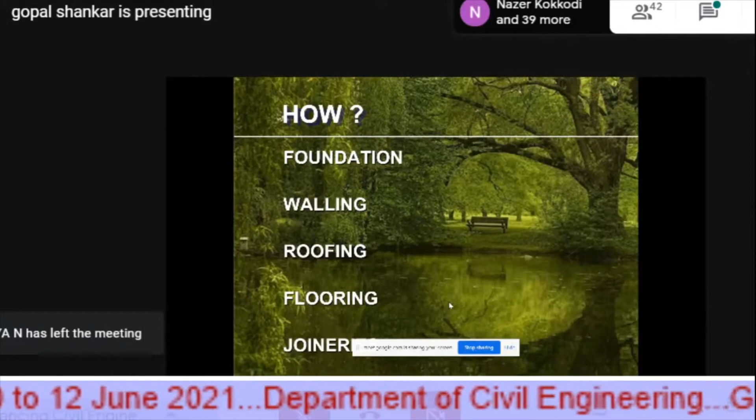Cost-effective technologies and materials can be used. We never talk about foundation cost-effectiveness, no, we don't talk about that. We talk about walling, yes, there are several options before you, validated by the Central Building Research Institute. They are all there, you know about certain options. But for foundation and roofing, we are very, very rigid.

If you want to make your building sustainable, you have to look at all these 5 elements: foundation, walling, roofing, flooring, and joinery. The time is very short, I may not go at length, but I will just mention some of the technology that we are trying to mainstream.

Rat trap bond, for instance, is actually a cavity wall. We sometimes call it rat trap bond because a rat gets trapped in this, it will not be able to escape. So to make it easy to remember, we call it rat trap bond, but it's actually a cavity wall, a 9-inch wall.

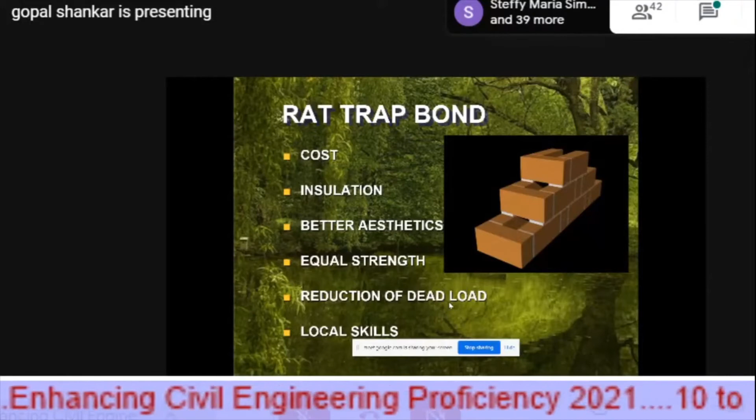What happens? The number of bricks comes down. You get a fair face on both sides, no plastering needed. When you avoid plastering, sand comes down, the quantity of cement and labor comes down. And what happens as an after-effect? Insulation. The space in between actually insulates, the air column in between insulates.

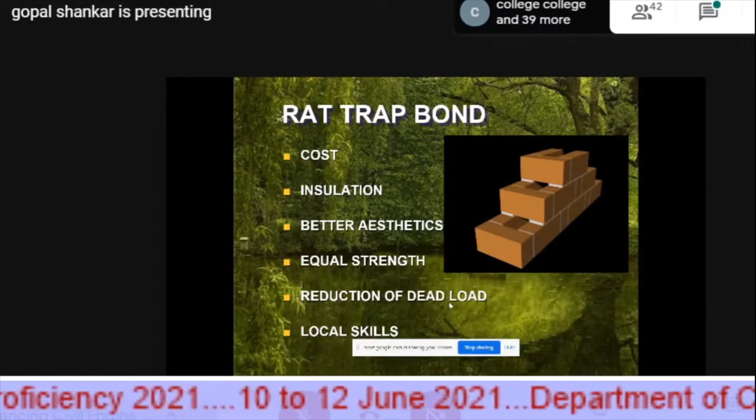People think that this is not strong enough. We went to the Central Building Research Institute. We went to SERC, Structural Engineering Research Centre, at Chennai, for validation of this technology.

How do you measure the strength of bricks? The strength of bricks is the compressive strength of the material. The compressive strength of normal, ordinary material is very high. We always multiply it with a factor of safety, and the results are quite acceptable. Ordinary country-burnt bricks are very, very strong in this.

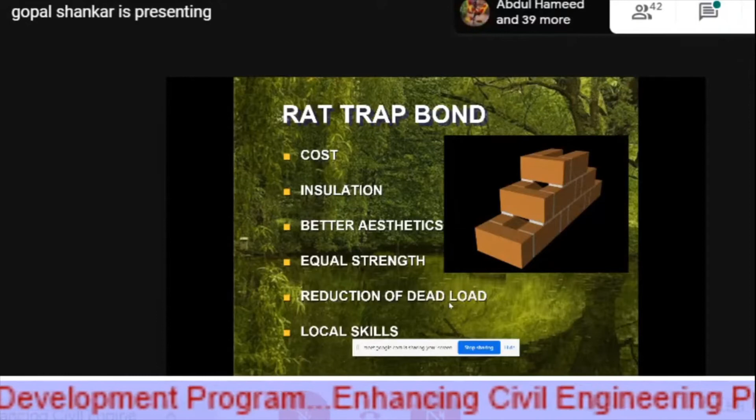These bricks, you'll be surprised to know, this is stronger than an English bond or Flemish bond kind of masonry, because you are putting the bricks on edge. I'm telling you, when you really look at it, let me put it another way.

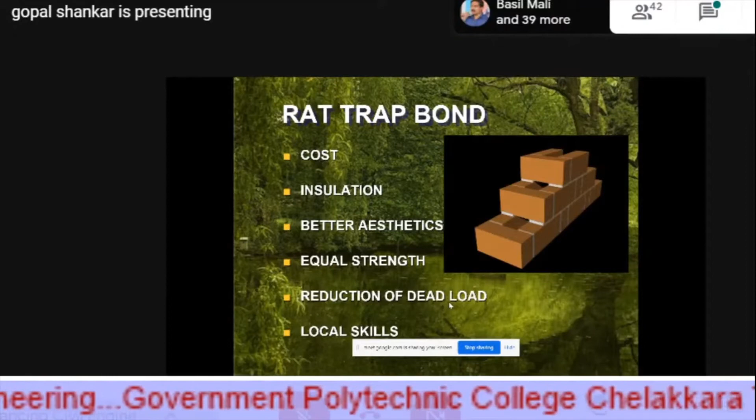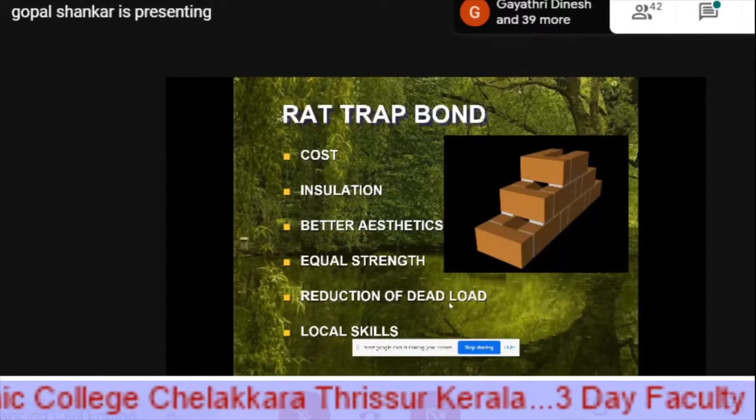You take a brick, a stronger lot among you, the male members. Probably if you are trained in karate, you put it on a support, with one chop, probably you'll be able to break a brick. But if you put the brick on edge and try to chop it, your palm will get broken, not the brick. Very simple technologies and very simple engineering.

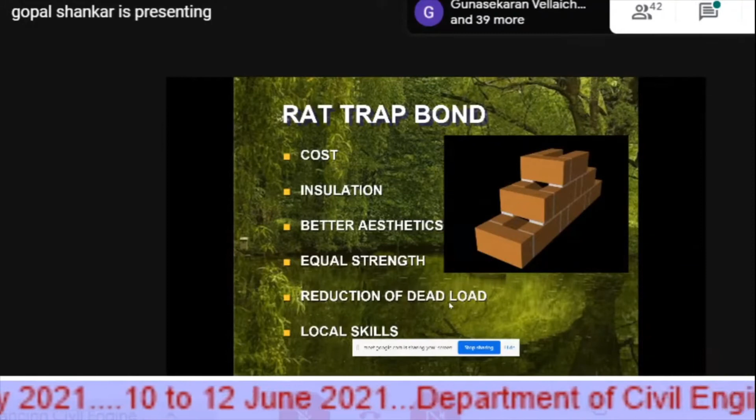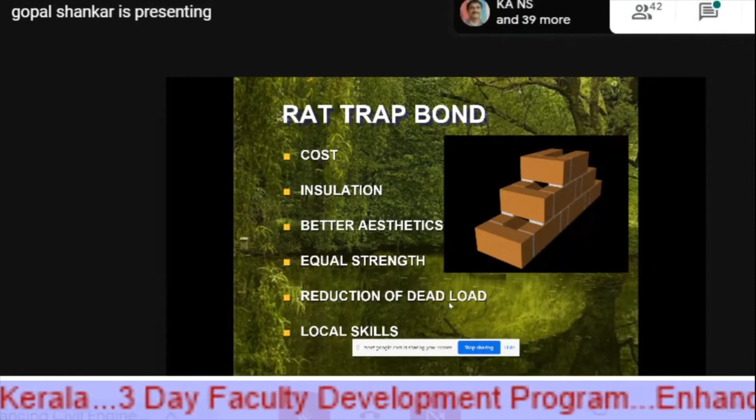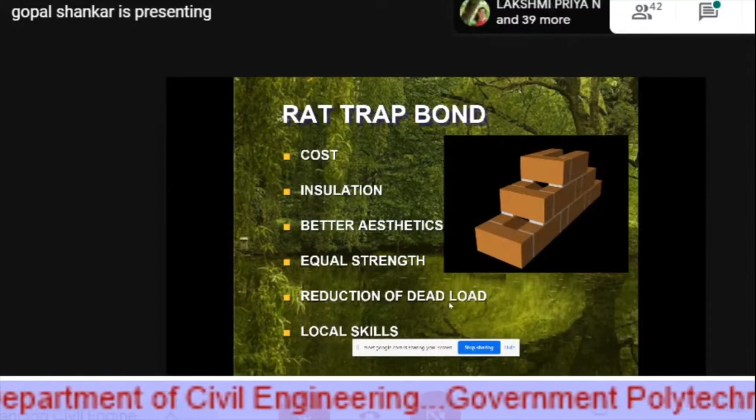And aesthetics is very beautiful because you get both the faces. Normally when you do a brick masonry 9 inches, you get only one face fair. The other face looks terrible, completely out of this thing. So here what happens is that you get both the faces, no plastering needed, more strength, better, and you get insulation in between, and it can be done by local skills. That's why this is how you should promote a technology.

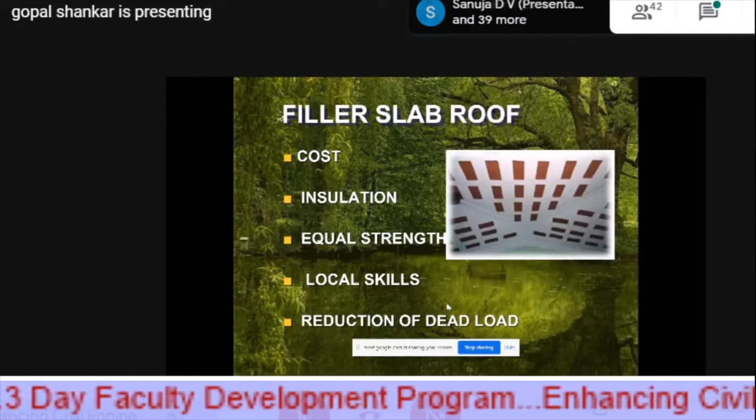Now, when you're talking about filler slab, I'm talking about 35 to 40 kilograms per 100 square feet of area. Are you shocked? I'm sure you're shocked. How do I reduce the quantity of reinforcement inside the slab? It's something that is quite interesting. I should actually tell you that.

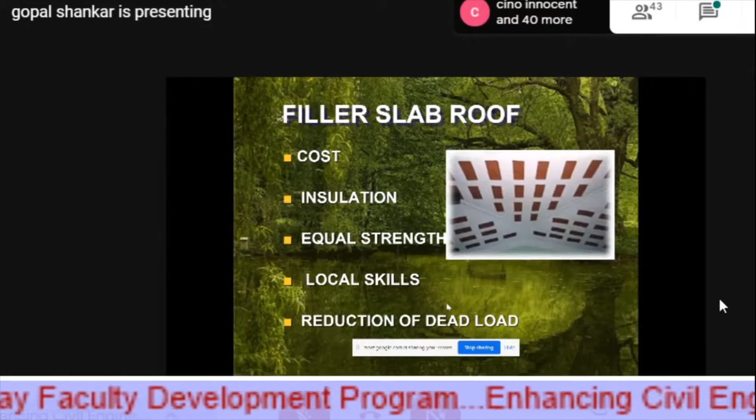How do you calculate the strength of RCC slabs? What are the criteria of this dead load? Many of you may not even know the weight of concrete. 1 meter cube of concrete, that is 1 meter into 1 meter into 1 meter, weighs around 2,400 kilos, my dear friends. 2.5 tons, my dear friends.

1 meter cubed of concrete weighs 2.5 tons. You can imagine the self-weight of the slab. Self-weight of the slab is very, very critical. That is the most important criteria when you design an RCC slab. The self-weight comes down by more than 50%. Now let me come to the dynamics of an RCC slab.

There's a tension zone and there's a compression zone. I'm not a civil engineer, but let me tell you, steel takes the tension and concrete takes the compression. When I say about RCC slabs, there's an imaginary neutral axis that passes through the center. Below the neutral axis is the steel. Above the neutral axis is compression, and that is concrete. Below the neutral axis is tension. But how can the reinforcement stand alone?

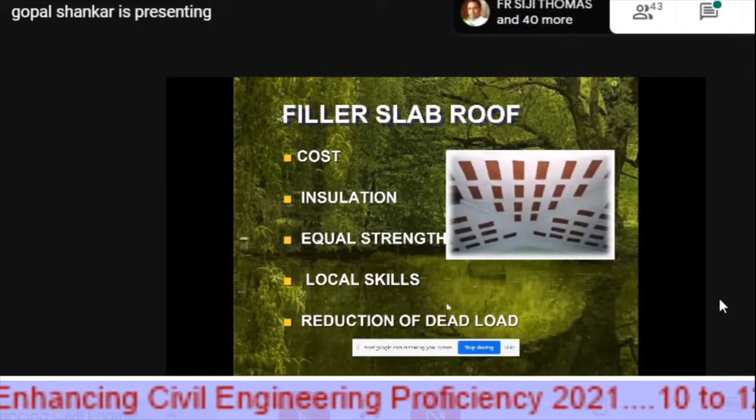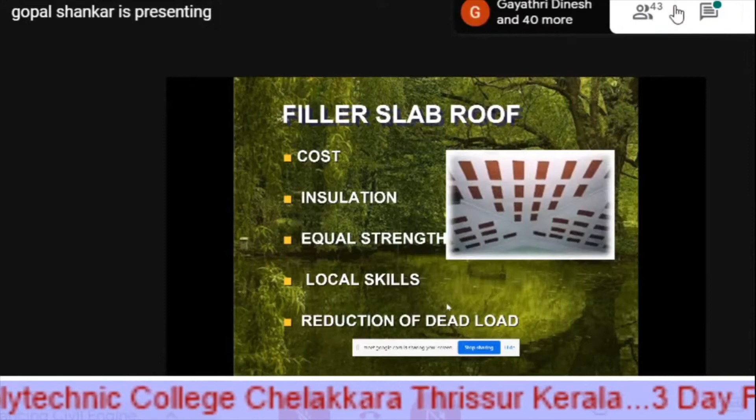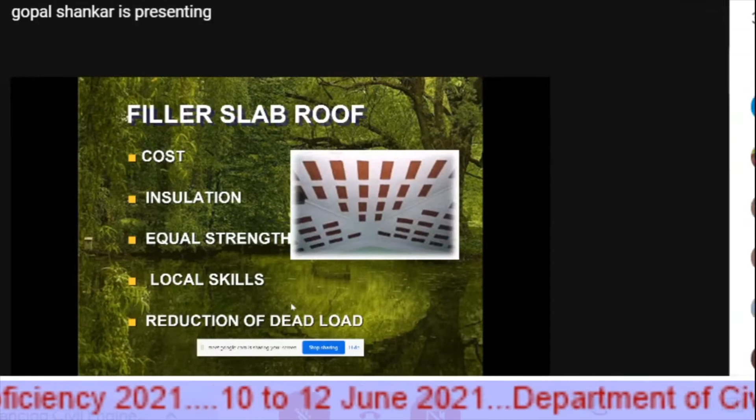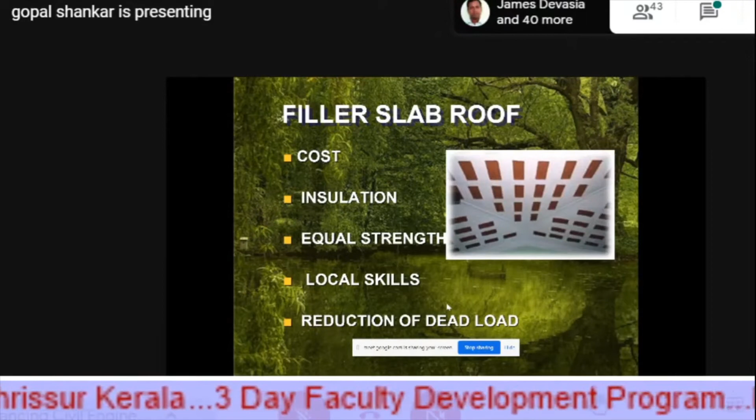You need some kind of covering. That is why we put concrete around the steel. Why do you need to put concrete around the steel? If it reacts with atmospheric air, rust can form, iron oxides can deposit, it will eventually affect the strength of the material. To insulate the material completely from these kinds of atmospheric vagaries and chemical reactions, we pack it using concrete. Concrete doesn't have any other function on the lower side.

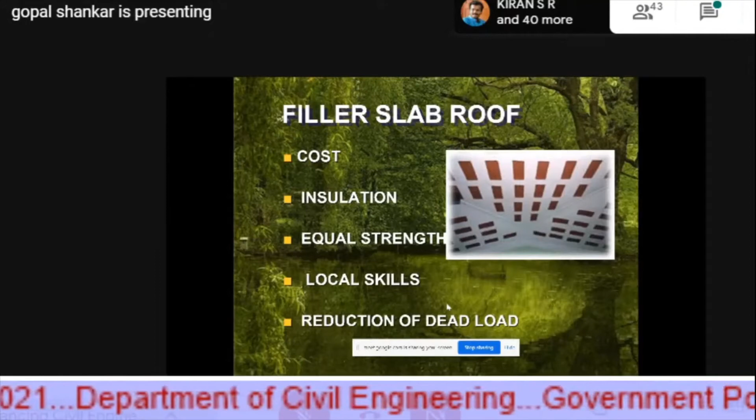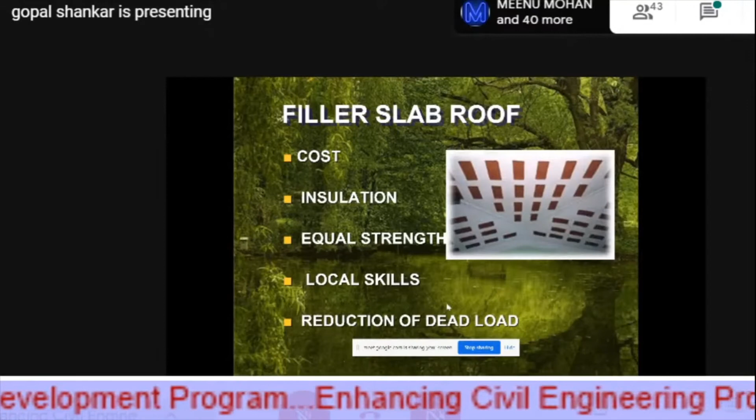So we take the concrete, the weight of the concrete comes down, and we use two waste tiles, rejected tiles. It's a filler material, it need not be a rejected tile. It can be thermocol sheets, it can be any damn waste material, it can be trash. You get it at a cheap price, and it's very easy because once you take the shuttering out, it will look good. You can see the picture there. It looks good. So these kinds of materials, I was talking about

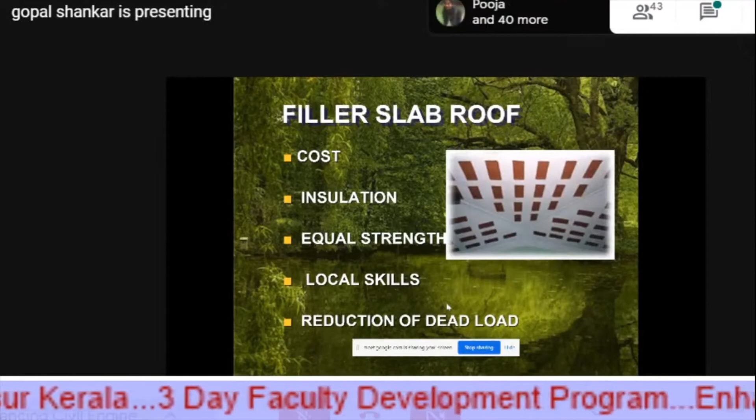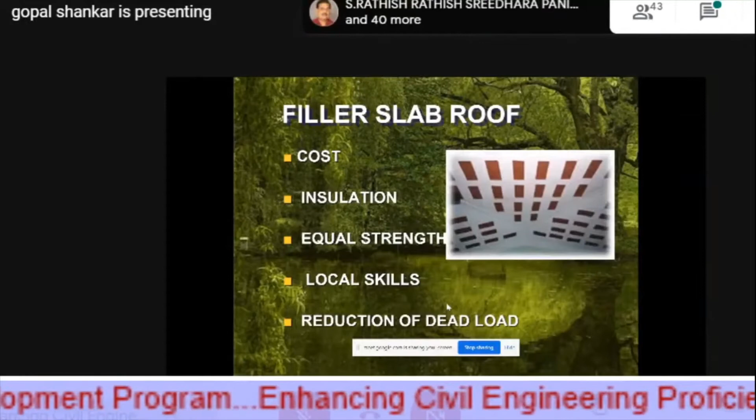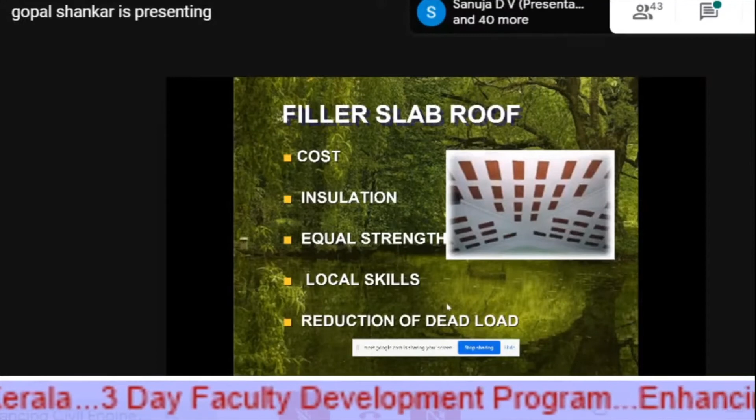rat-trap bond as a walling option, and a filler slab roof. You need lesser reinforcement, you need a lesser quantity of cement and sand. And two, it insulates. There are places where we put two tiles, one on top of the other, where we don't need concrete. There's a space, the profile of mangalore tiles, and it is slightly corrugated. The profile actually shows that there's a small air gap in between. That air gap actually insulates, very important, it insulates. And we have tested the load, this thing is equally strong as a very conventional RCC slab.

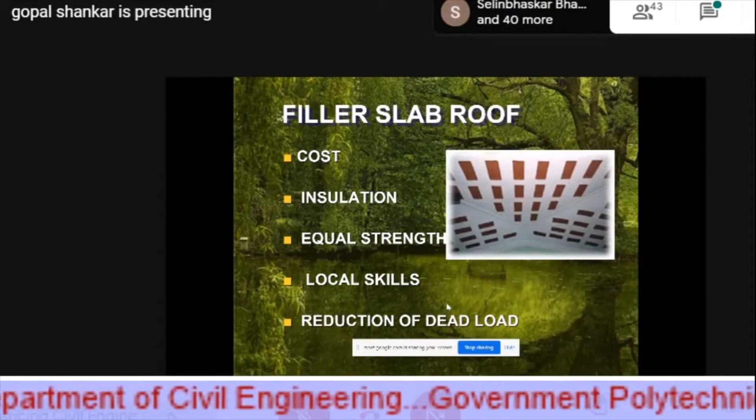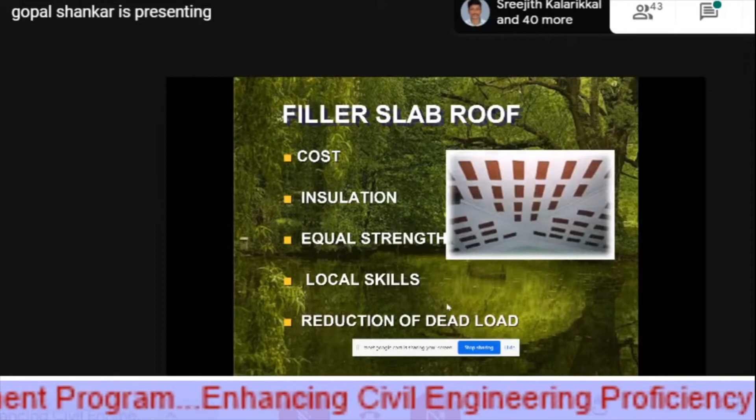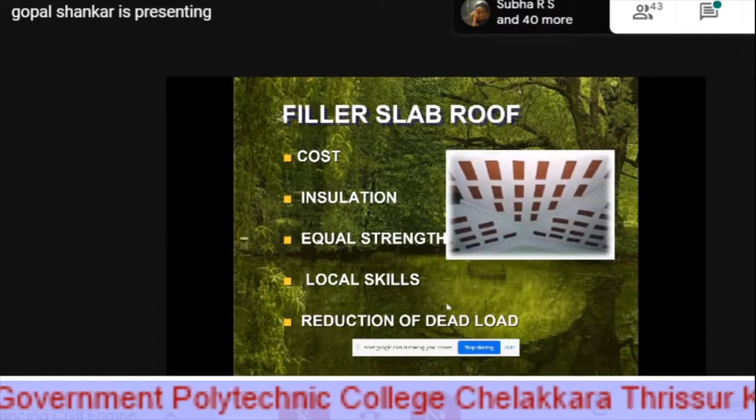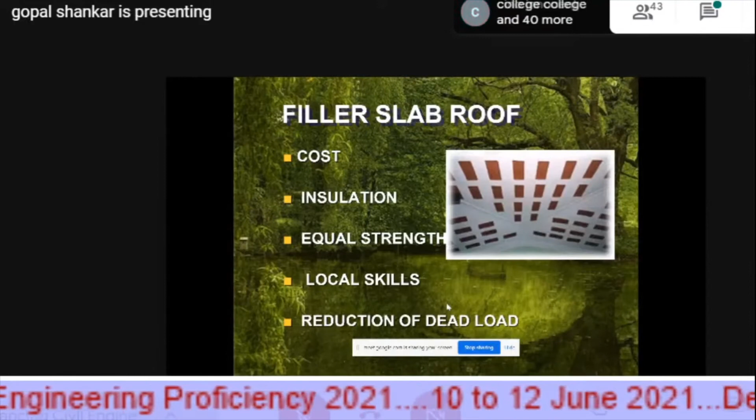And you don't have to bring people from outside to do this filler slab, our people know about it. The only thing is that you need to look at the spans, for everything, if you want to mainstream a technology material, you need to have engineering skill, engineering knowledge of the material and about the technology. That has to be followed, no shortcuts. If you follow the quality monitoring mechanism, then this technology actually saves a lot of money, and on the other hand, it's insulating and a very local solution. People had been ridiculing me for using terracotta material.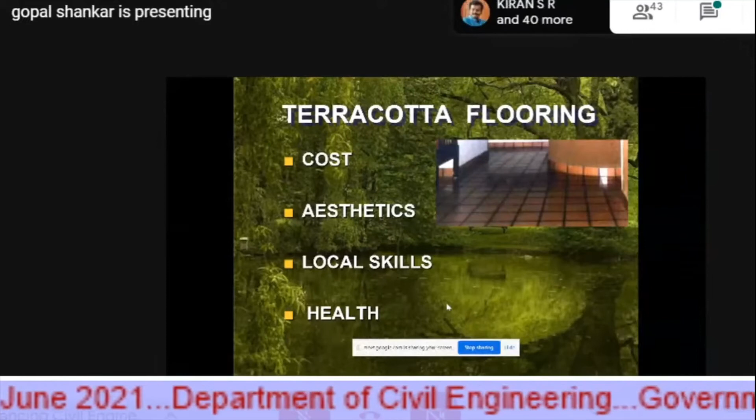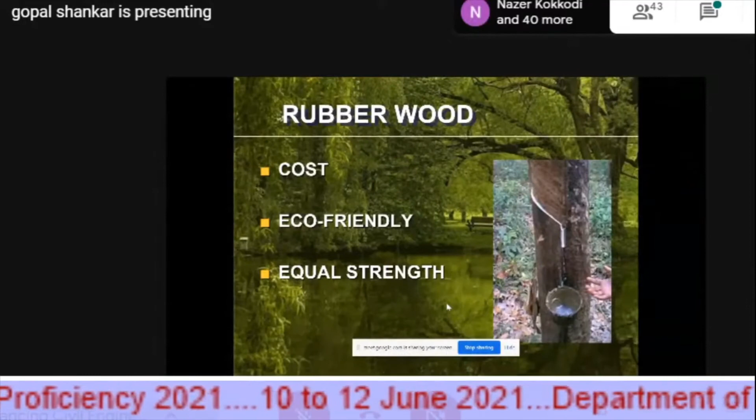When I started mainstreaming rubber wood property 30 years back, people used to take it only for packaging, waste boxes - after taking the latex of the tree for 25 years, you have to slaughter it. That's the word we use, slaughter the wood. Slaughtered wood would get carried away to some factory where they make waste boxes, temporary packaging and things like that. It's people like us who mainstreamed rubber wood in the main building vocabulary by looking at the properties of the wood.

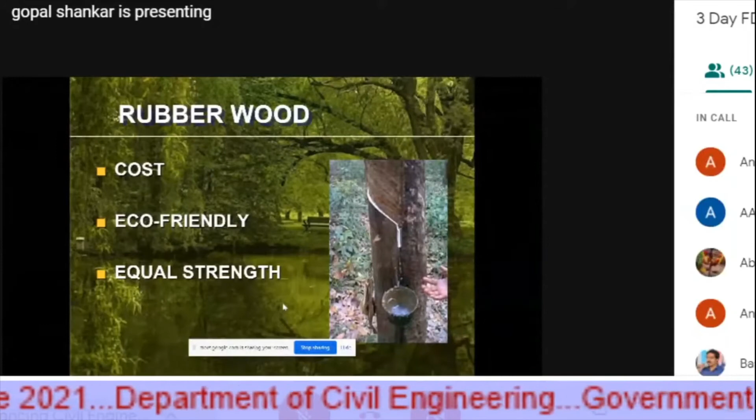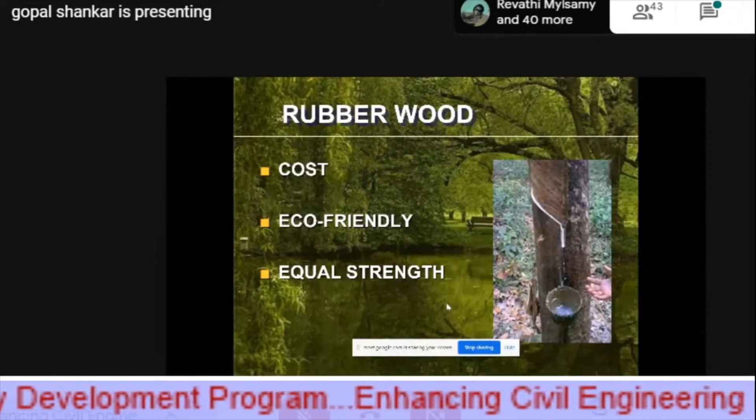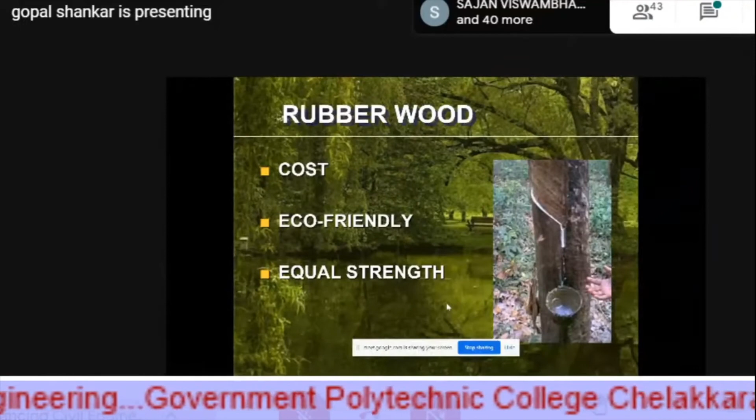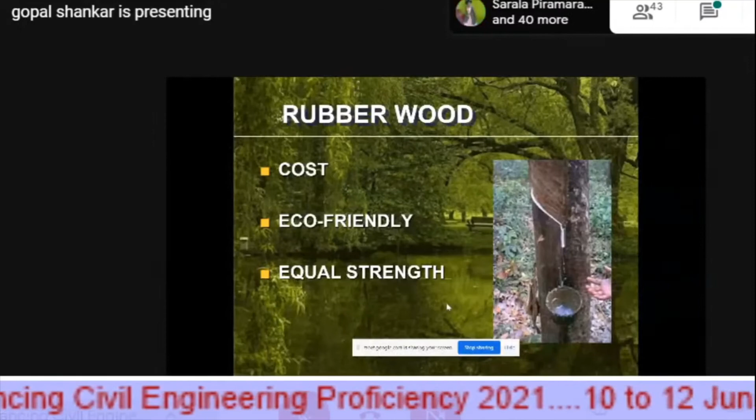I don't want to go at length because it needs a process. We have to take the moisture out, make it insect proof. But once you do this process, it becomes less costly. Wood is an extremely costly material now. It's eco-friendly because anyway you cut this tree after 30 years, so it's one of the most eco-sensitive solutions we have - otherwise it goes waste. They're reusing probably a waste material, and if you can attain the same strength - in fact in places like Malaysia, it's called green teak.

To the next slide. The last section of my presentation, I'm going to put a very provocative material and technology to you. I've been building with earth-based material for the last 15 years. I've stopped using bricks as a mainstream building material. Instead, I'm going for stabilized mud blocks and mud constructions - last 15 years - because I realized my mistakes in my own professional practice. I realized that burnt brick is one of the most unsustainable materials we can use, unsustainable in terms of energy sensitivity and eco-sensitivity. I realized it much later - you learn through your mistakes - but that is when I started turning to earth as a very basic building material.

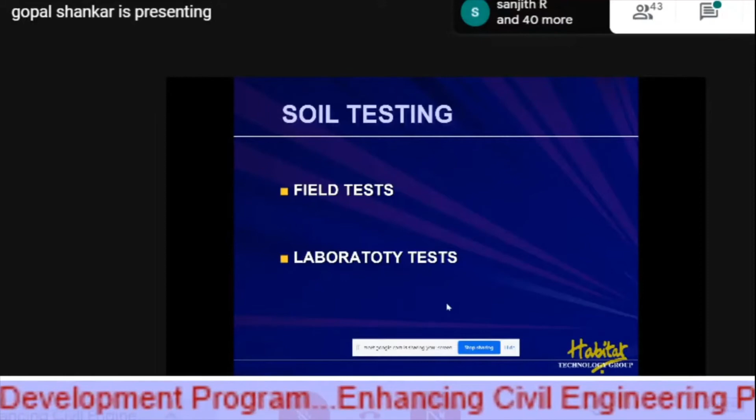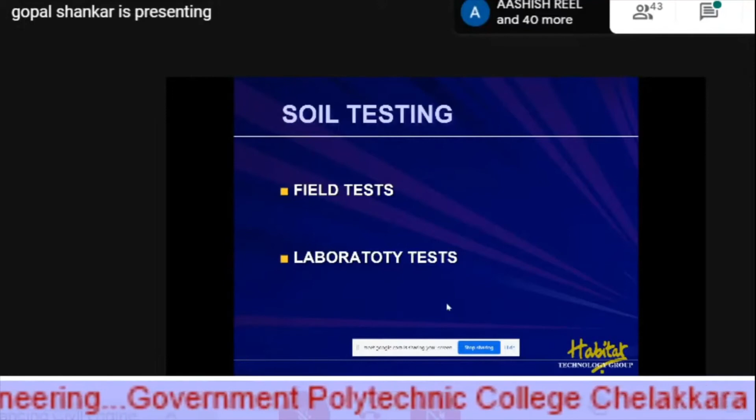One of the ingredients of soil - you talk about gravel, sand, silt, and clay. These are the four basic verticals of Mother Earth. Gravel you cannot taste because it will hurt you. Sand will grind between teeth - yes, there's a lot of sand in that. If it melts like chocolate, it means a lot of clay in that. If you feel like putting the maavu, feel like having duff, that means a lot of silt in that.

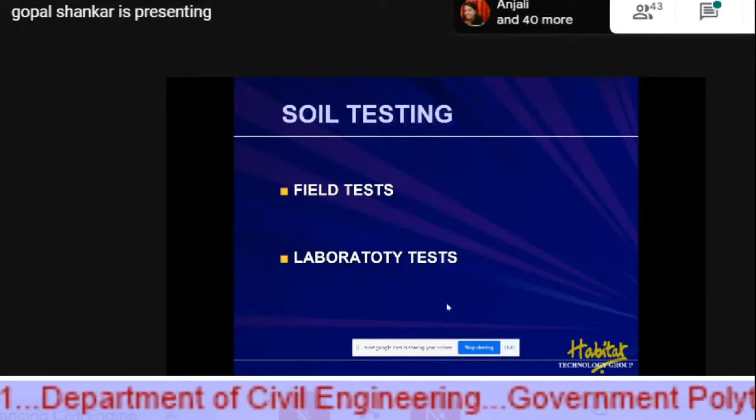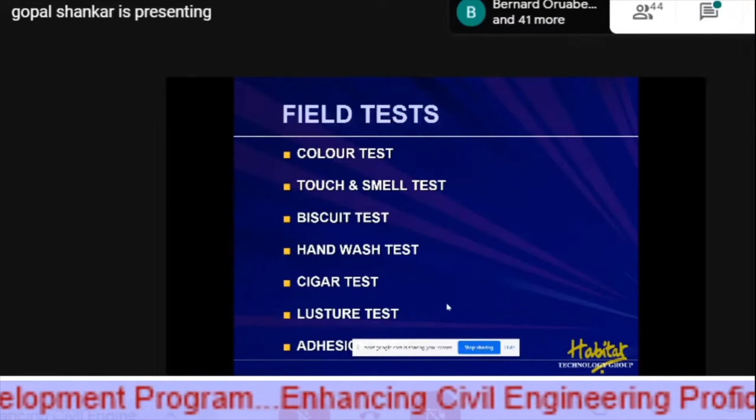That's how we do some field tests to ascertain the composition of earth. There are a lot of tests, but these are some of them. Look at the color - if it's musty, blackish, it means a lot of organic matter. You can smell it, and if you get a musty smell, we don't take it because organic impurities are a habitat of insects, termites and things like that. It becomes very bad.

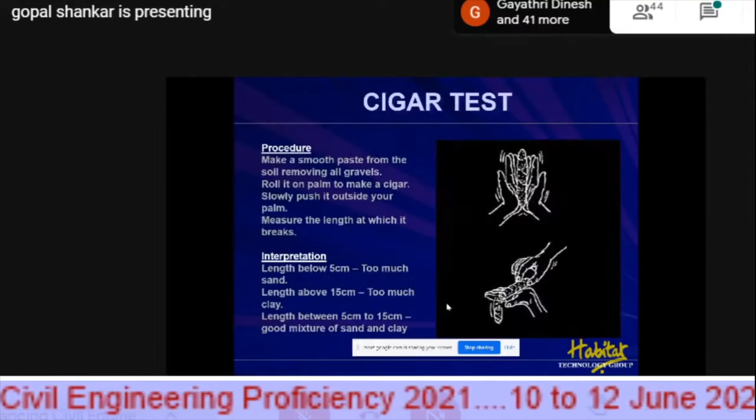12:10 already. These are some of these things that we do, like everything else.

Where can we use mud? Yes, you can use it in foundation, in walling, in roofing, and in rendering.

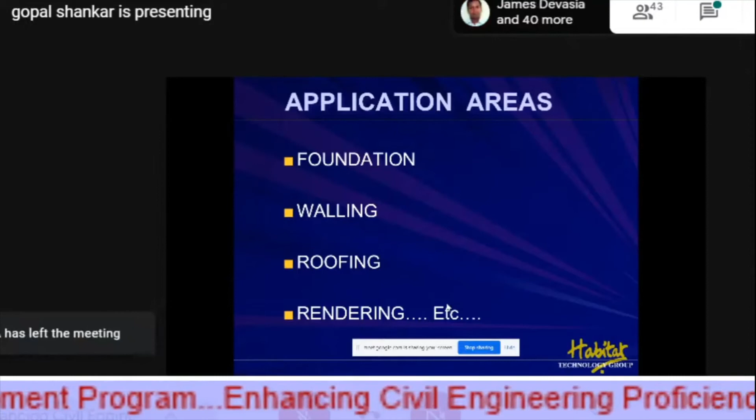When I say this, I say it with such conviction. After this presentation, you can go online and look at my own residential building - my name is Shankar, you can search on YouTube and see my own building. This is probably the first building in Kerala where they have used mud as a roofing material, without reinforcement, without any cement over that. Floods came to my building in 2018, and it still stands.

Extreme testimony to the technology - when water came into my building, people came to see whether the building was still there, looking at all these details.

I'm telling you, mud can be used as a beautiful, strong, durable foundation. Mud can be used for different walling, for roofing, etc.

I had to quickly go through this because otherwise I'll leave it half finished. Cob is one way of doing it - you take the mud, make it into round balls like footballs, and throw them one on top of the other. It's a very rustic technique used for centuries. This technology is called Cob construction.

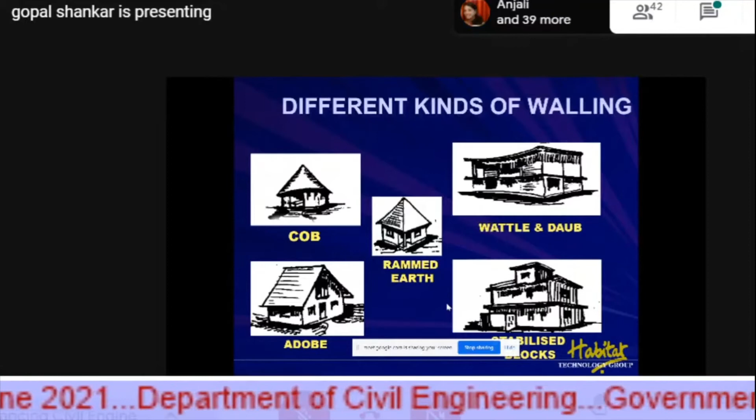Rammed earth is when you put shuttering on both sides, put earth in, and then ram it. Very extensively used in Europe, Australia, United States - where you find this kind of rammed earth construction, it's very popular and strong, but not very acceptable in Kerala because we need shuttering materials. Shuttering is costly - you need to bring a carpenter and pay rent for shuttering materials, but the basic material is completely free. When you take the shuttering off, you get beautiful finishes - a very beautiful solution for walling.

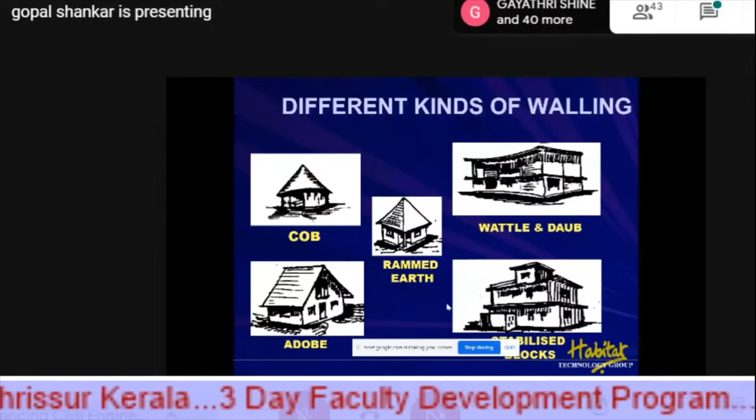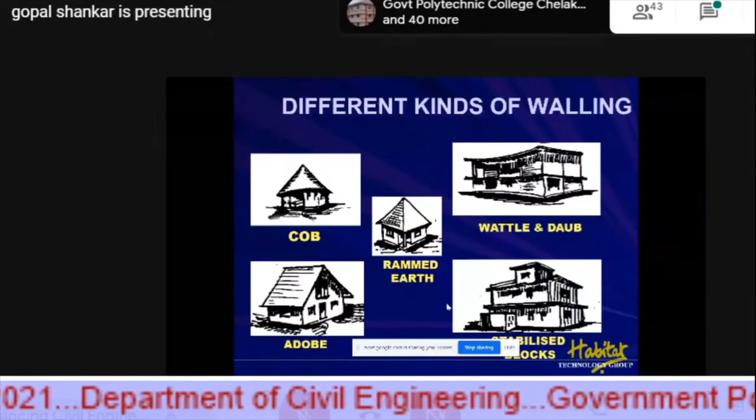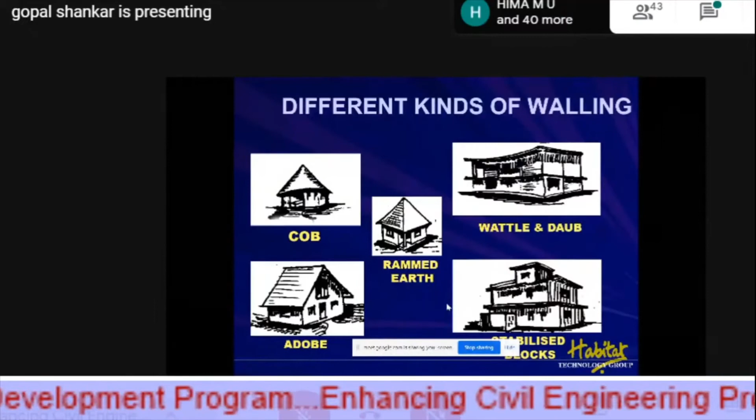Wattle and daub is again something you see as a common sight in Assam, in Northeast India, and the eastern part of the world - Laos, Cambodia, Indonesia, Thailand, Malaysia - you get this wattle and daub. One great advantage of wattle and daub is it's earthquake resistant. In earthquake-prone areas this is very good because you will not die - the walls will wobble, probably mud will come out, but the wattle, which is the main structure made of bamboo, will not come out, and you can put back the earth by daubing.

Daubing is actually smearing earth over a framework - that is called daubing.

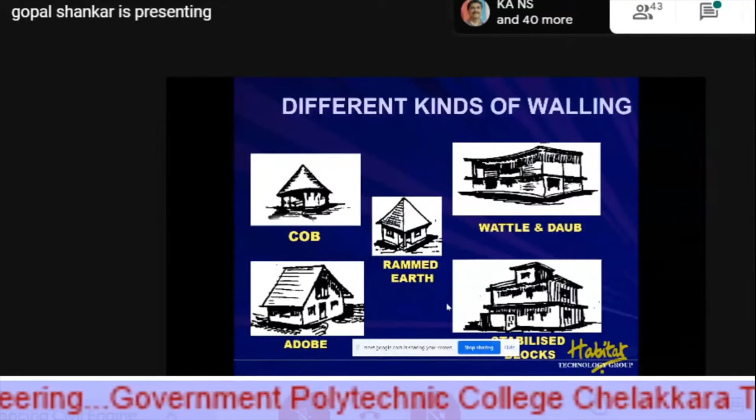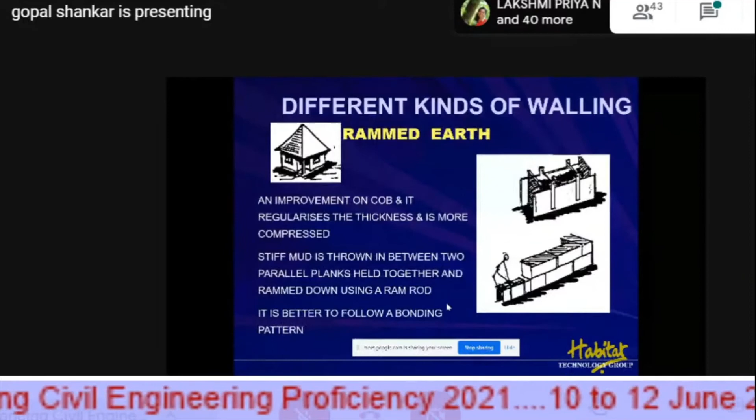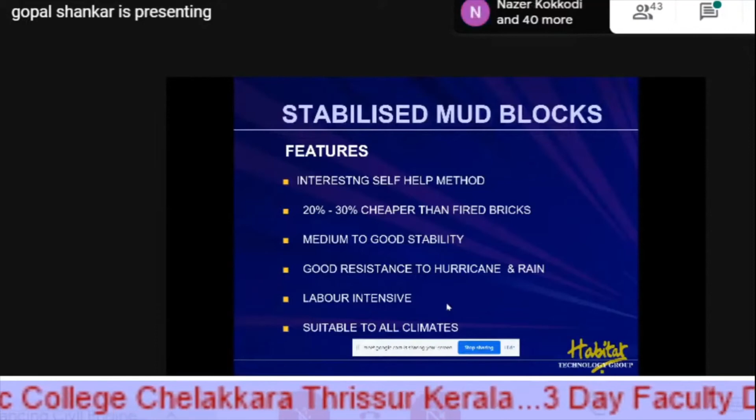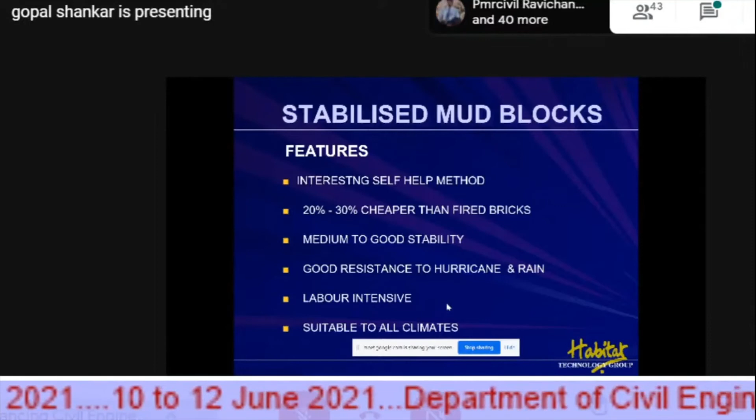I'm actually promoting stabilized mud blocks. I'm the person who single-handedly started promoting and mainstreaming this material, and it has become a kind of cottage industry across Kerala. In most areas, you get hundreds of factories now producing these stabilized mud blocks. Habitat Technology, pushing this thing forward.

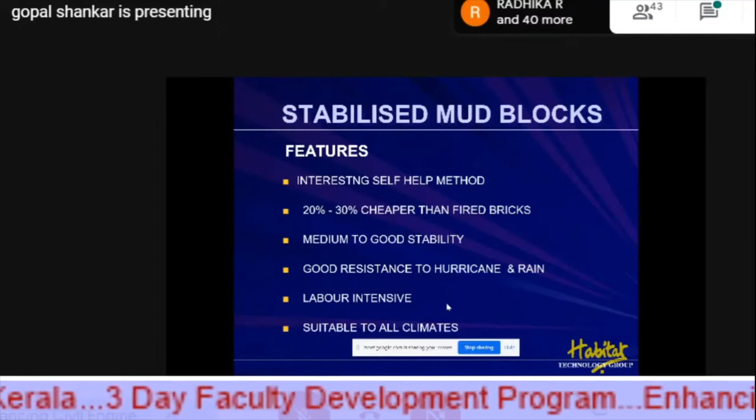I think this is the material for the future because it's less costly, a very interesting self-help method. You can actually make some of it on-site via a small machine. It has good resistance to weather, is very labor intensive, which is needed for the Indian economy, and is very stable and very strong.

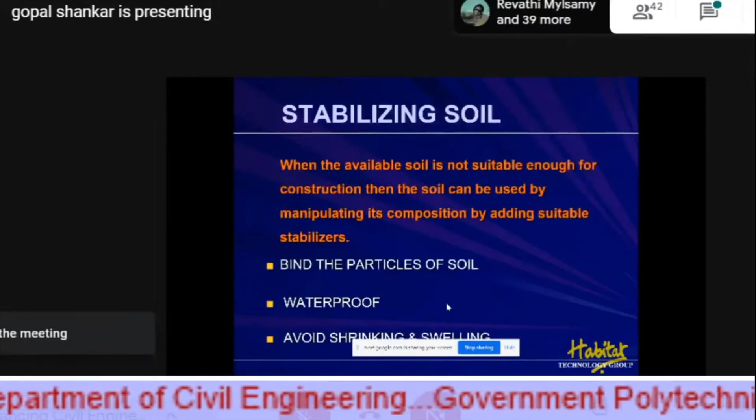Why do you use stabilizer? You need to bind the particles of soil, you need to waterproof it, and all these things. Where do you get the mud from?

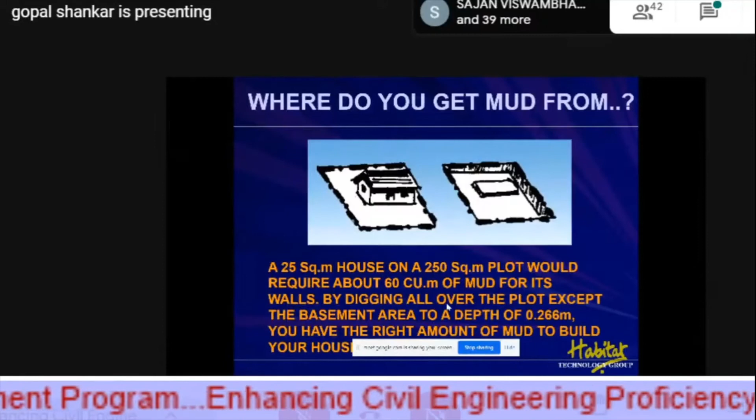If you have a small little plot, I'm telling you, 6 cents of land, and 0.266 meters, 26 centimeters deep, you get all the mud required to build probably a 300 to 350 square foot house. Only less than a foot of soil will help you build that.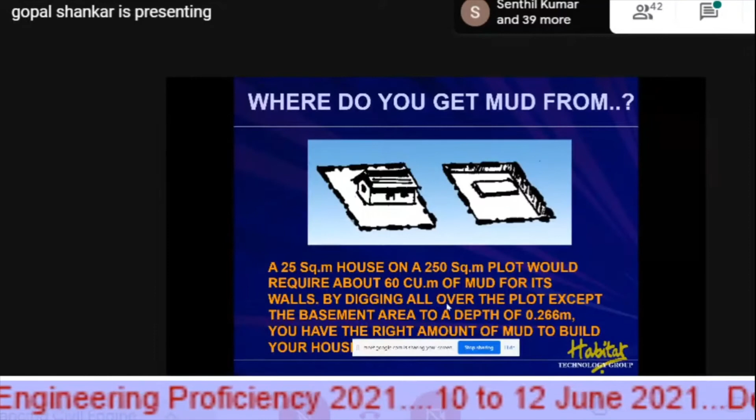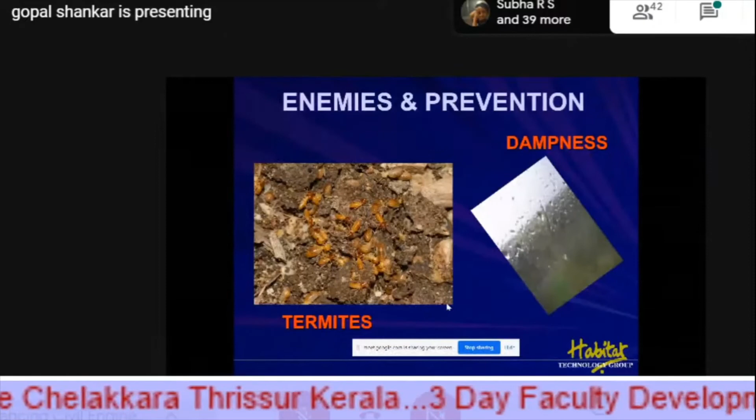And obviously, when you talk about this technology, termites and dampness are issues. The Central Building Research Institute has brought down some specifications. It's called non-erodible mud plaster, to prevent dampness. And for the termites, you have to look outward.

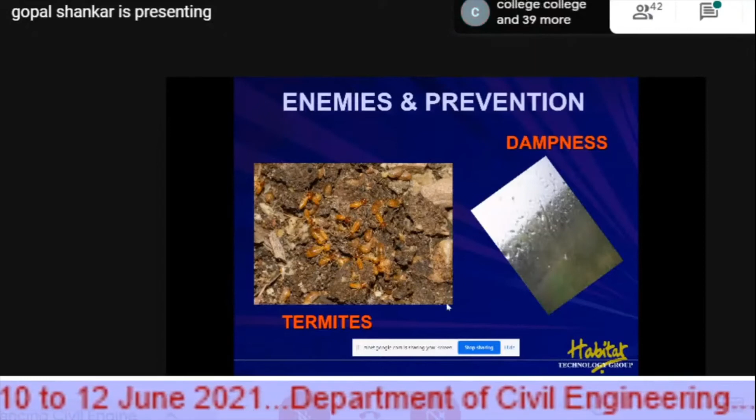The richest lime deposit in the world is in Kerala, and there's no other agent like lime. If you mix lime with mud, you have a resistant wall.

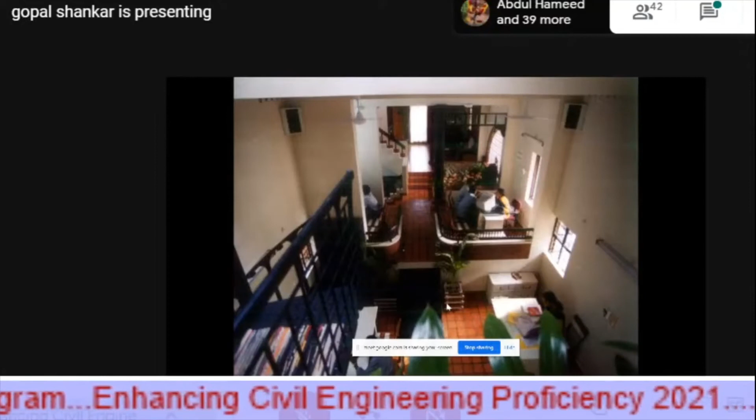People think that mud buildings are shoddy, low cost, not aesthetic. This is a picture that was taken 15 years back. A strong building, 4-story building.

These are some of the, I know by looking at the picture itself, old buildings. And this particular building, I don't want to go into detail, time is limited.

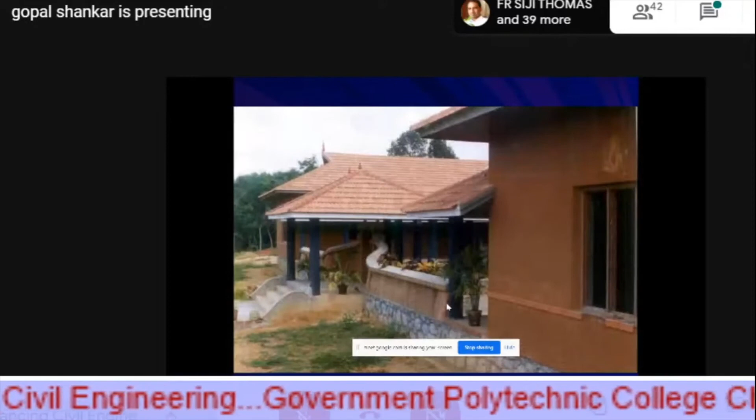The first earth building that came out in Kerala was for an IAS officer. At the time, she was an IAS officer. There's a huge story behind this, the EMS Academy library block made out of that. And a few resorts, all made out of earth. This is what I wanted to show you now.

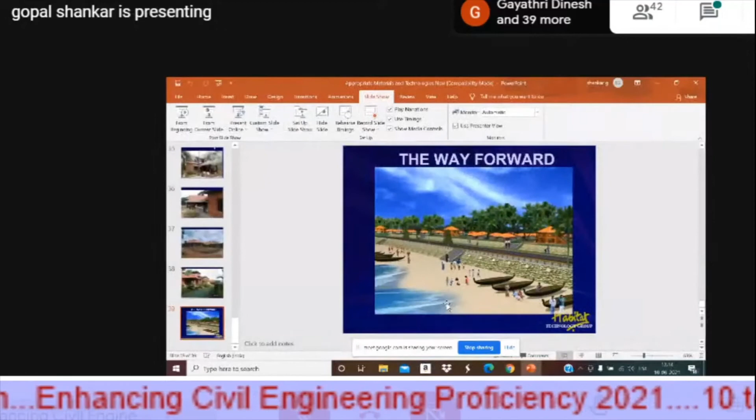Why I wanted to tell you about this appropriate technology, this is the only way forward, my dear friend. You are losing options. This is the only way forward.